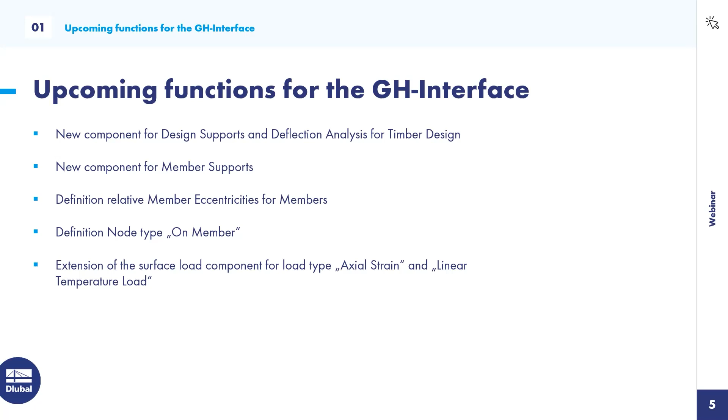Okay, so let's start with the structure for today. Let me first show you a picture. So the inspiration for today's structure is this tower model.

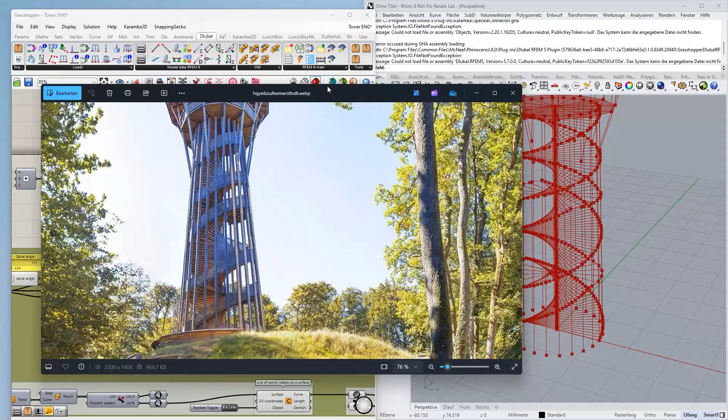And that's how now I show you how we organize the script for this model. Okay, I divided the model into 3 parts.

We have a bottom part for the first spiral staircase, for the second spiral staircase and the third spiral staircase. Every staircase has a different angle for the steps.

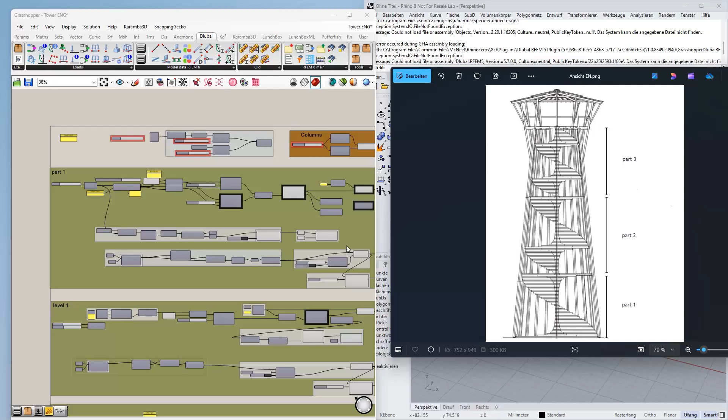So here you can see we have part 1, the first level of the structure, part 2, the second staircase, the second level of the structure, and the third part, and also the roof and the observation platform at the top.

Okay, and the following idea behind this: imagine we are in the early phase of our concept finding phase, and we want to consider different variants or different alternatives for our structure. As a part of this consideration, we limit our structure changes with help of parameters we have defined in the script.

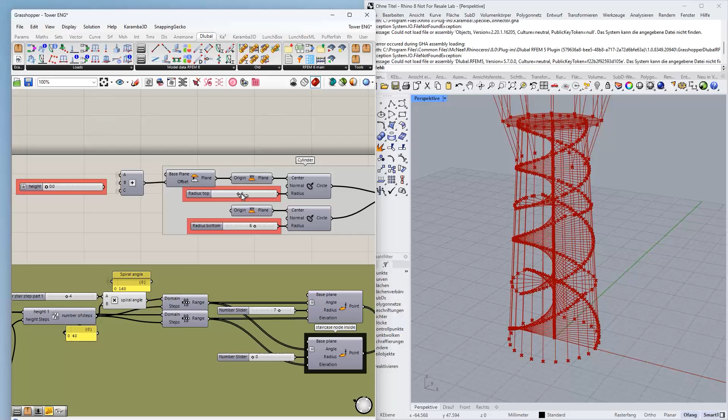So for our structure, for example, we can adjust the radius at the top. We can adjust the radius at the bottom as we wish. And we set again 6. And we can adjust the number of columns we want for this model.

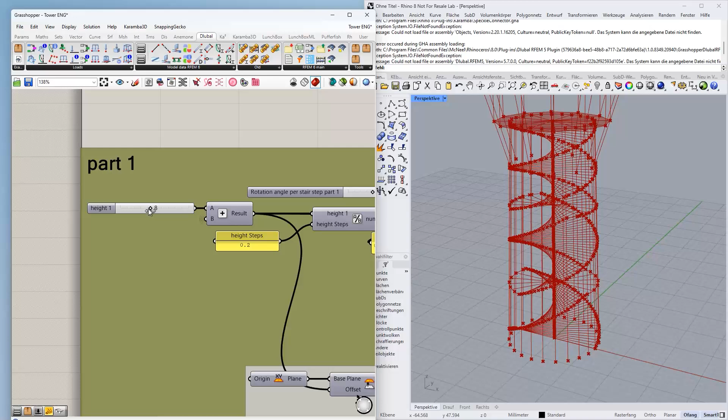And also we can adjust the height for every part. So we have the height for part 1, we can adjust here. Also for the second part, we can also adjust the height if we want. And all these heights are connected in this one number slider, so we can now adjust the height for the whole structure.

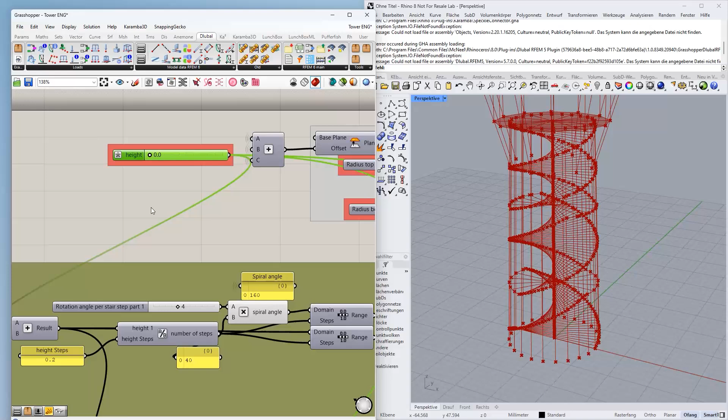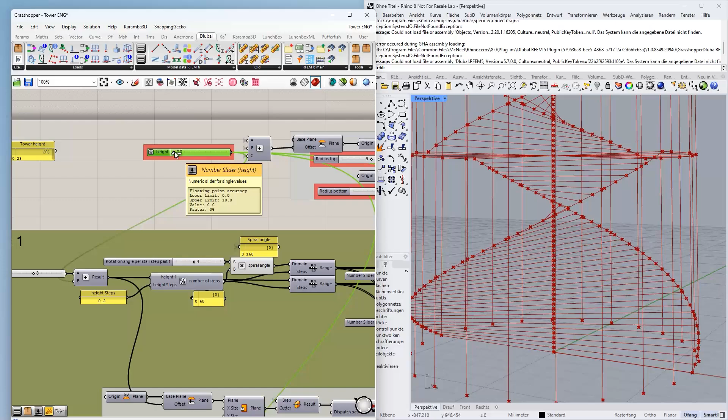And it's like adding one step always to every part of the structure. So we have a height step of 0.2 meters. It always stays the same because it's like these beams stacked over each other, and we can now control this model by adding always one step to every part of the model with this parameter. So we are adding steps to the model, and also the spiral angle always gets bigger if we add more steps for every part.

Okay, now we don't just want to look at the aesthetics and design of the structure, we also want to read out the structural engineering results for possible design variants, without much effort, and include our results into this concept finding process. That's the whole idea behind this structure.

So we need to connect this parametric geometry to a working parametric analytical model, and also extract or calculate the results for this model instantly. That's the plan for today.

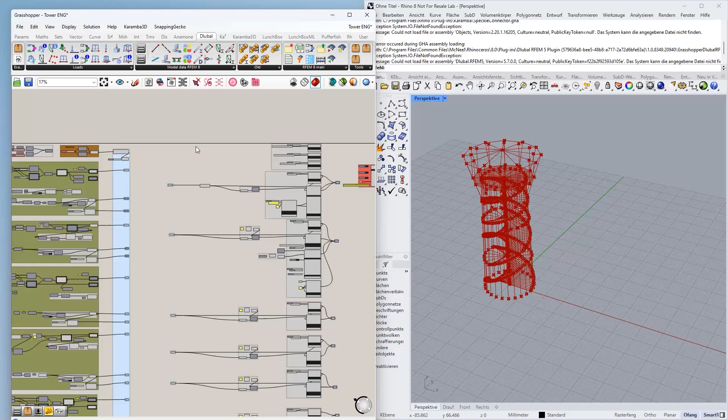A small brief comment on the geometry of this model. We need the model to look at, but we can make it smaller. Let's have a look at this structure of the geometry.

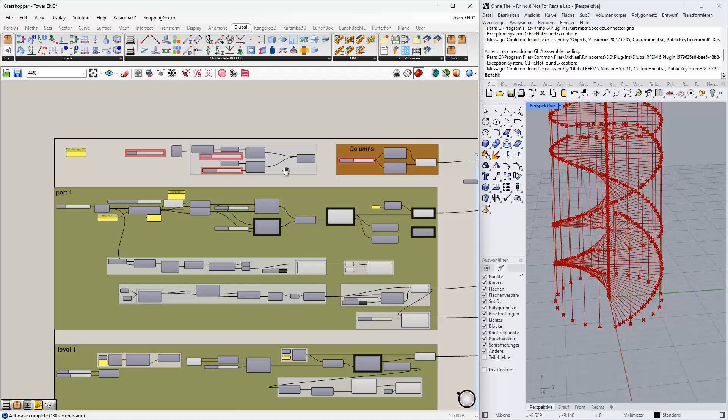At first we have here the lines for the steps, our steps going upwards. These steps have an intersection with this edge beam, and these are the intersection points with the edge beams. This edge beam also has an intersection point with the columns.

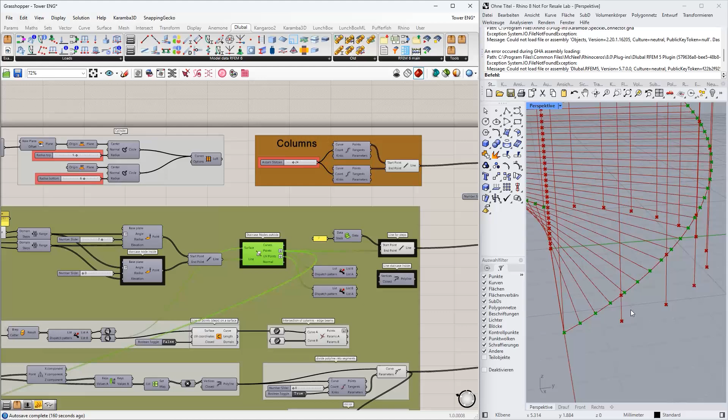So if we generate or interpolate this edge beam only with the nodes of the steps, we get the correct line, but we don't have the intersection point with our columns. We need these intersection points later for member set definition, because we want to define member sets for our columns.

So how I solved this: I took the intersection points of the edge beams with the columns, and the intersection points of the edge beams with the steps. These are these points, you can see both points. Now I generated a line for our edge beams through these points.

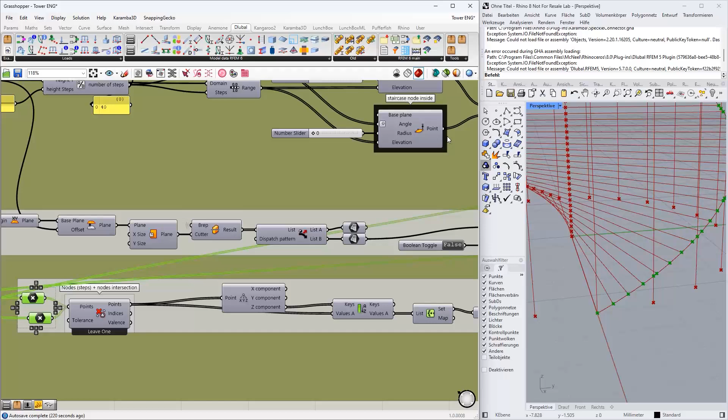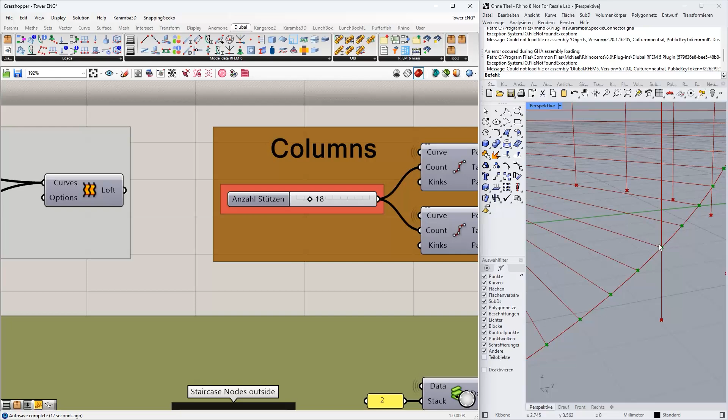The problem we might get here is if we adjust our parametric model in some cases - for example, if we move the number of columns we have here, in some part we get double points. For example, let's have a look. Here we have the same intersection point for the column and the same intersection point for the stair beam, so in this case we would get double nodes in RFEM.

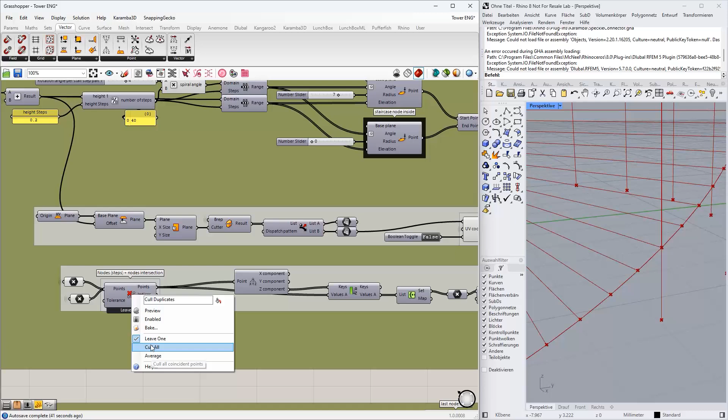To avoid this you can use this Cull Duplicates component under Vector - it removes double points, and you can just leave one or cull all, however you want it. Here we have two points at the same spot, so we can just leave one of them and don't get double nodes inside RFEM afterwards.

Afterwards we can also take this polyline curve we have, and divide it into segments using the Shatter component. So we can divide the line into segments, and we are able to assign every segment its own index number in RFEM.

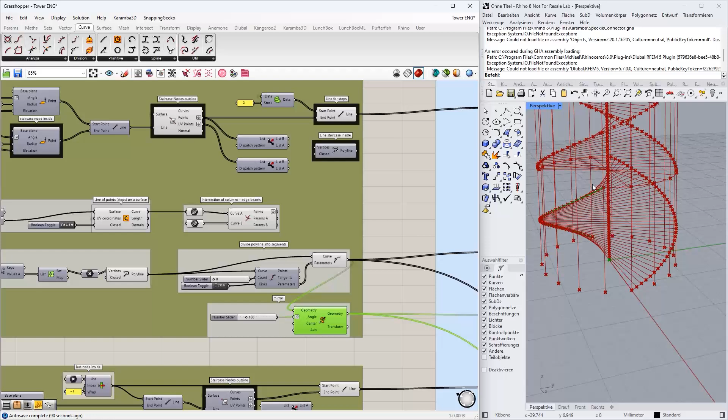Afterwards it's copied on the other side - we used this mirror function to copy it for the other staircase. This is how the script works for all the parts, it's always the same concept. I won't show you more about this geometry, you can have a look at it for yourself afterwards.

What's also important for us is that we also divide the columns. Like I said, we have the column lines and we want them divided at the intersections. Why do we need this? We want to design the columns afterwards as a set of members, and we need these intermediate nodes to define lateral supports at the intersection points.

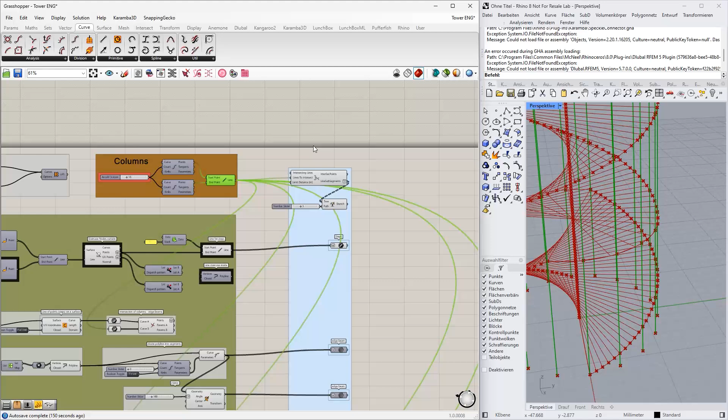For this I used the Line Intersection component, so I can define a line I want to intersect - that's our columns - and define the line this column is intersecting with, the edge beams. Now I can get the segments for every column on a separate branch. Here you can see I only get line segments out of this component, with all segments stuck together in one branch for every column. We can use this later for our member set definition in Grasshopper, making it very easy to define afterwards.

Let's make it very easy to define afterwards. Okay, that's just some comments on the geometry.

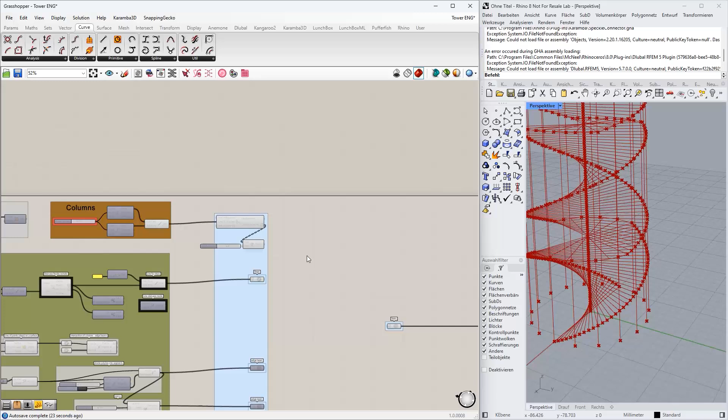If we look at the script we have now for the whole geometry: we have the lines for our stairs, the lines for our columns, the edge beams for our structure, the observation lines for the observation platform, the roof beams, the vertical stands outside, and also the rod in the middle. Now we want to connect these simple lines to our RFEM plugin and use it for calculation.

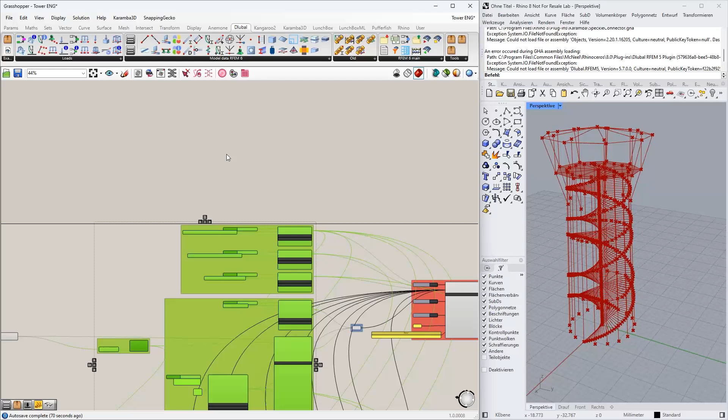Let's start at the top. Here you see the RFEM components. It's the same procedure as in RFEM. First we define the material, then the cross sections, and then we assign members to the Grasshopper lines we have here. We assign the member.

So let's start at the top with the material. I'll make this big. First step is to assign an index number. In RFEM you have an index number for every object we define, so you have the index number for materials, sections, nodes, lines, etc.

That's the same workflow for the Grasshopper components. In our Dlubal plugin after installation you have load elements and model data elements. Here you find the material component. You can define some different stuff we don't need today. So first we can define a material number 1 and the material name.

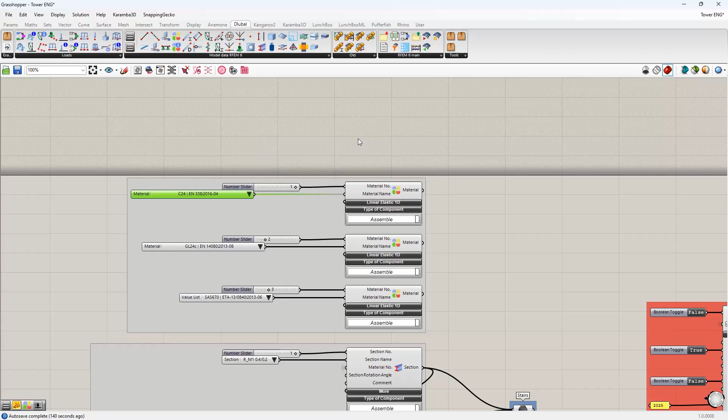Here's something I like to mention: where you get the material name, we don't have a component for the whole material library from RFEM, because it would be a very big library for every country. So it's very easy to define its own little library as a component. So how do you get the names of materials and also for sections?

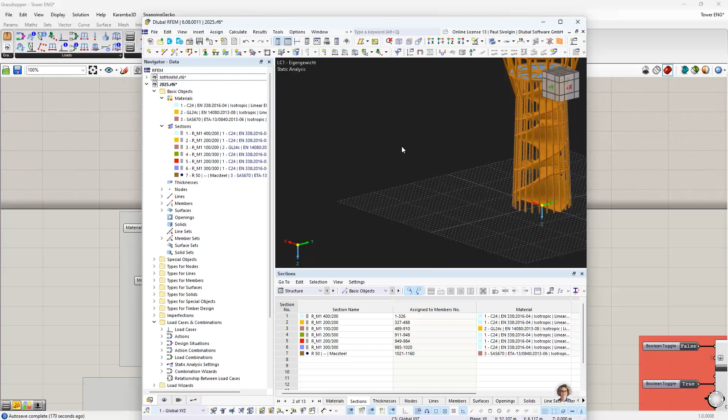I will show you this quickly in RFEM. All we need are the names of the sections, for example, and also the names of the materials. Here you see the full names. It's very important that you use the full names. Where do you get the full names from?

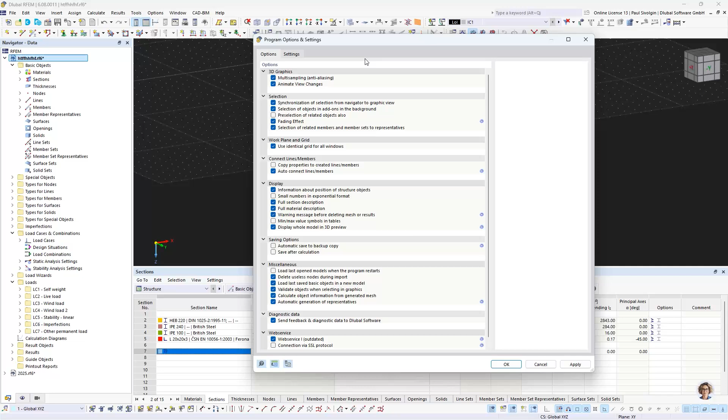If you open the program options, you have the display settings to show full section description or show full material description. That's important because RFEM uses the name of the sections and also the code it's designed with. If we don't display the full name, you will get only short names, and then you use a completely different standard than you want. So make sure you always have this option activated to display the full names.

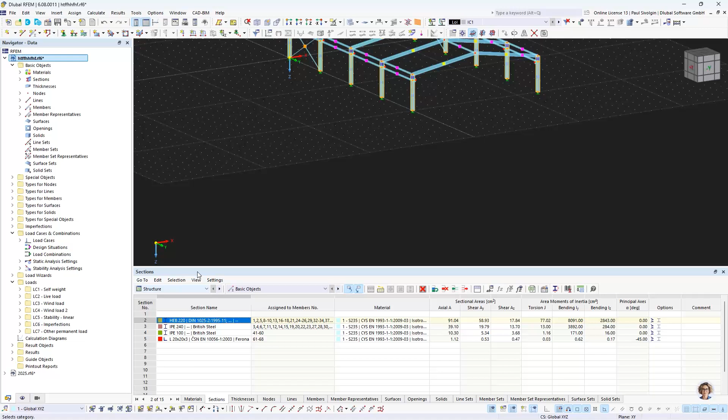And here you also get the standard you're working with. Afterwards we can copy these names and generate a value list, a simple component in Grasshopper, and inside this value list we can edit it and insert these names. So now you have a small component with your own library, and you don't have to do it every time.

You can save this component as a user object. For example, you can create a user object for this component. Here you can set some values: name, RFEM sections for example, add a description, and select in which category you want to have it. Select an icon and add it to your Grasshopper interface.

I already did this. I'm using here some components for my RFEM materials. We have materials defined, and also a component for the sections. We have sections defined and can always use them in every project.

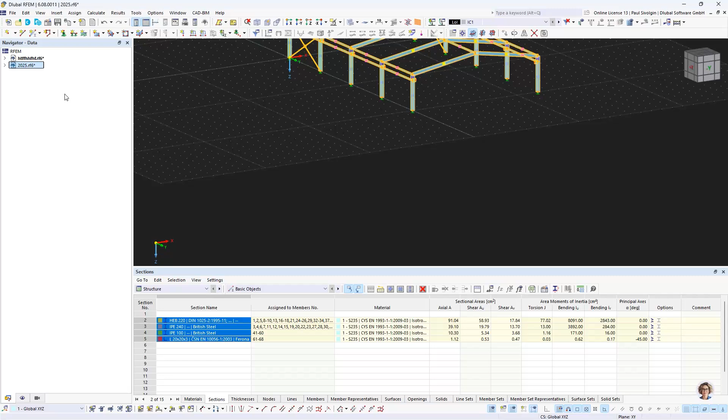So there's maybe another important hint. If you use parametric sections in RFEM, so if you define something like this section, you have parameters you can define in millimeters. It's a bit tricky in Grasshopper because Grasshopper always expects SI units, so our interface works with the Web Services API, and this always expects SI units for the export.

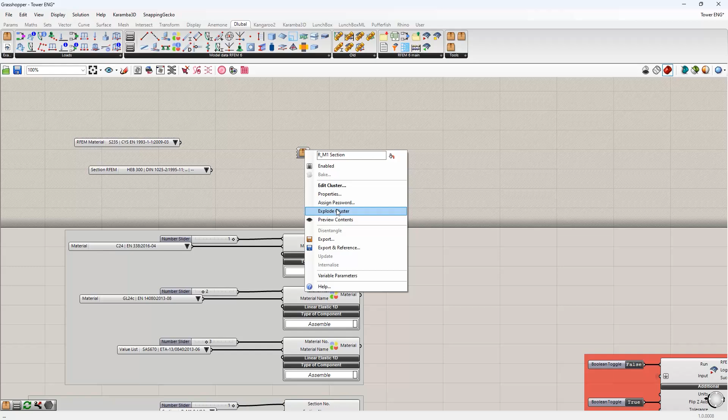And for this, I generated some tools for myself. Maybe I can show this export cluster. For the basic rectangle section, I can always define the height, define the values I want for my section, and then I can just copy this name and insert it into my list. This is automatically generated from Grasshopper.

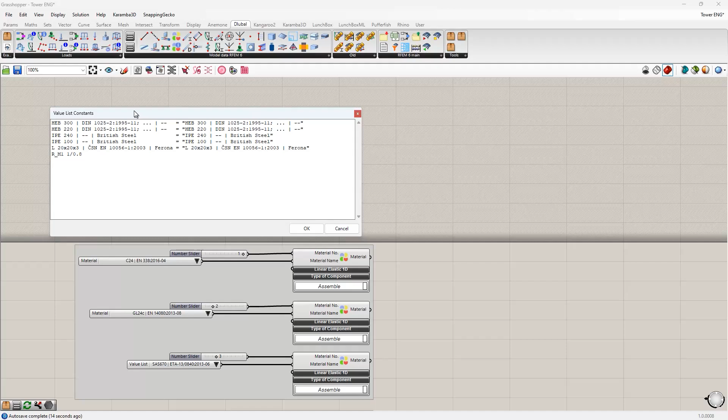So you don't have to find it yourself, you can just insert the name, press OK, and you have the section now inside your little library.

Here you need to make sure if you add some sections while working that you need to save this component again, so you can just delete this user object, mark it and say okay, save this user object. This will be taken over like you defined already, press OK, and this section will be added to this library.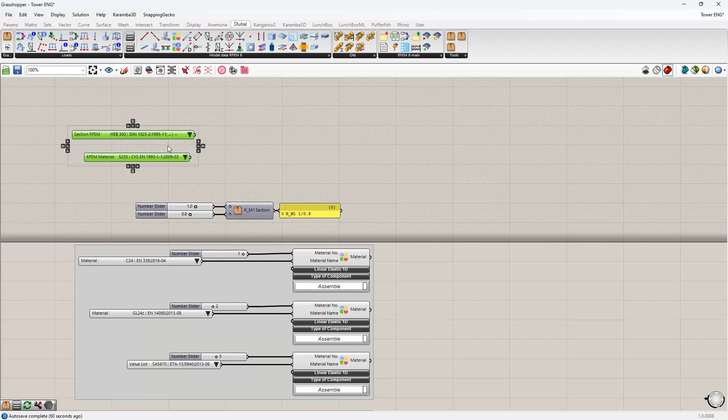Now let's have a look at the further components. Give me a minute. Yeah, to the section component.

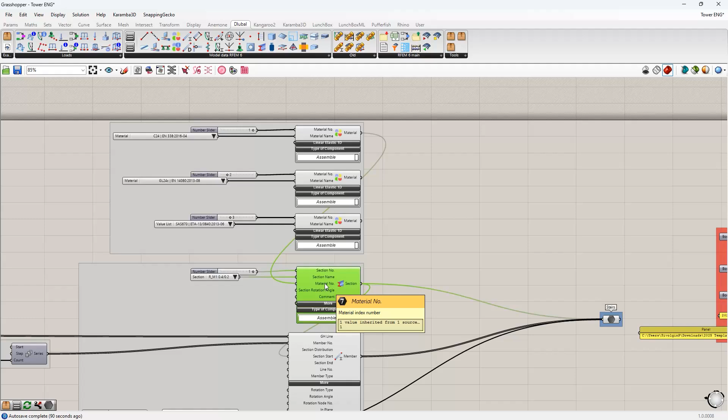It's also the same. You define the section number, define the section name again with your little library you created, and the material number. The material number can be taken over from the material component, so if you adjust here the number will also be adjusted here. We have different inputs for section, rotation, angle, and some other inputs we don't need here now.

And now let's connect the first Grasshopper lines to RFEM with creating the member component. So here we have some lines from our stairs. We assign the member.

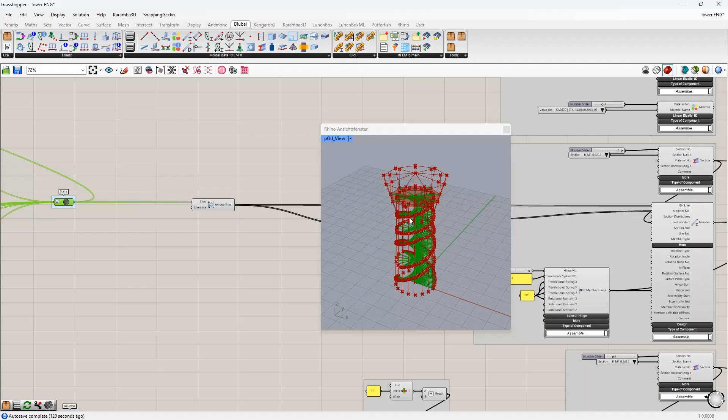Maybe I show it like here, lines from our stairs. And here I have maybe also a hint from my side. I had some problems with double lines, because as I generated the stairs, the last stair of the line is also the first line of the platform here, so I get always double lines at these areas. It's more like an unclean modeling from my side.

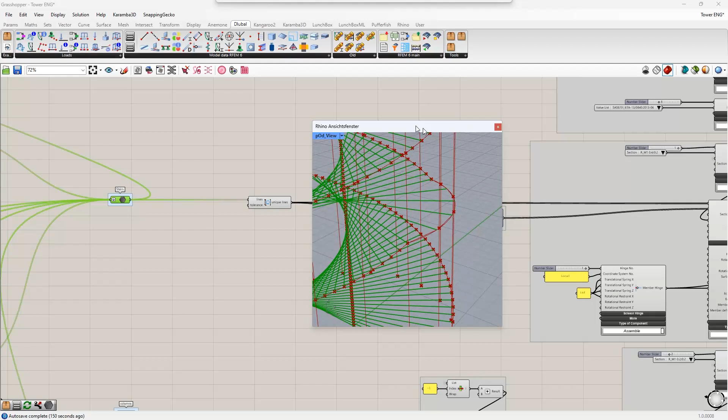But for this problem, there's an easy solution with this component. It's from Kangaroo, the Remove Duplicate Lines component. You can just remove duplicated lines and don't have to remove them with lists or something else.

So here you have 328 values, 328 lines, and here as the output you have 320 lines, so 8 lines removed, 2 lines, 4 lines for every platform, I have doubled lines.

Okay, the next step would be section distribution. This is controlled by a value list, where you can assign what you want, if you want a uniform member or a linear member. I think that's the parts we support for now. So it's basically always uniform if you don't define anything, so you don't have to define this if you don't want something specific.

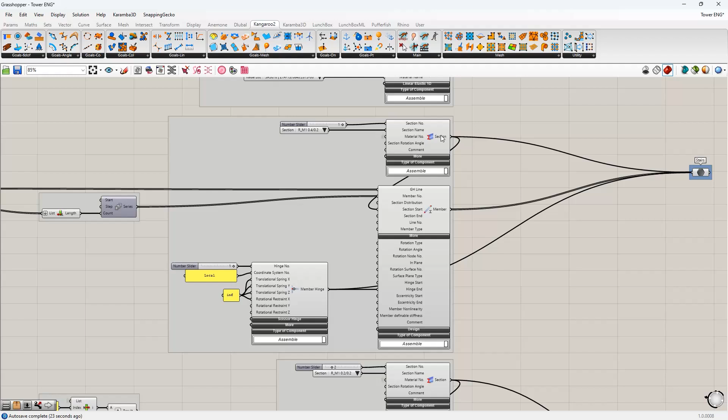The next step is to connect the section. Our sections are already defined, so we can just connect this component for our member.

And afterwards we have, I forgot something, we have the member number. The numbering is assigned automatically, but for load definition in Grasshopper, it makes sense to define it by yourself. So we want to start the numbering by 1.

It's very easy, you can use this series component, and we start the numbering by 1. I have a step of 1, and the count is our value of lines for the stairs. So we take the lines from our stairs, it's the line number, and this should be our list length, and this list length can be used as a count for our list. So we have now here number 1 to 320, and we just connect this to the member number input, and we will generate in RFEM members with the index 1 to 320.

Now if we generate other member components in Grasshopper, we don't want to start the numbering with 1 again, we want to continue this series. This is also really easy done. You can just read out the last number from this component, it's 320. Here we read out the last number of the series, add 1 to the series, and now we have the series starting with 321.

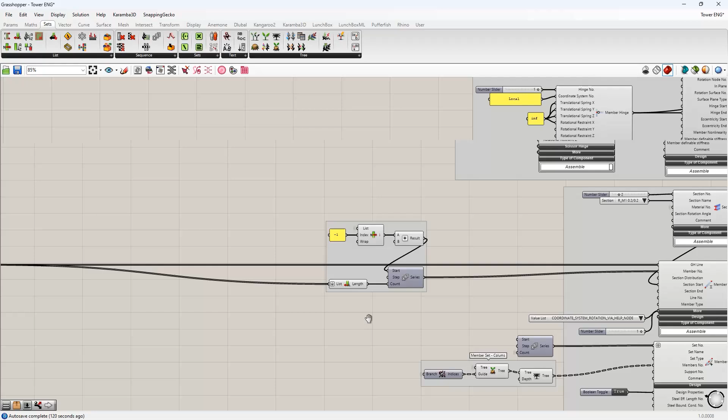Step also 1, and the count again the next list, that's our column list. And we have now the series for our column members. And this just, if you can generate further members, like here, it's just a copy and paste function. So you continue the series of this component, and here the numbering is continued with this series. Here it ends at 441, and this starts at 442, and so on. So it's very easy to find for numbering.

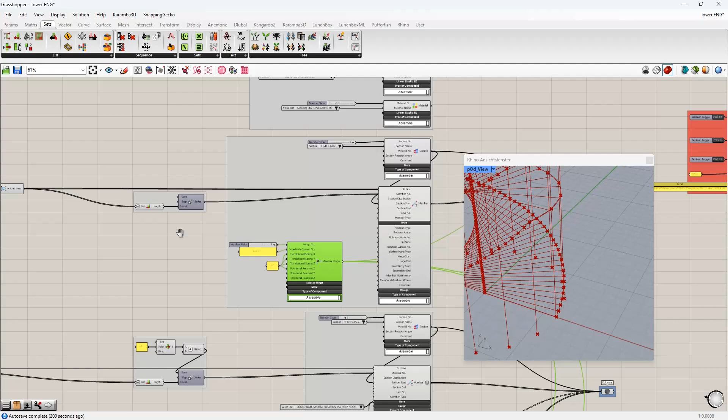Next step would be to define maybe some hinges for our structure. We can also define hinges inside Grasshopper. So for example, we want to define a hinge at the end of every step, and we are not sure if it's the hinge start or the hinge end of our member, and this can be easily checked inside Grasshopper.

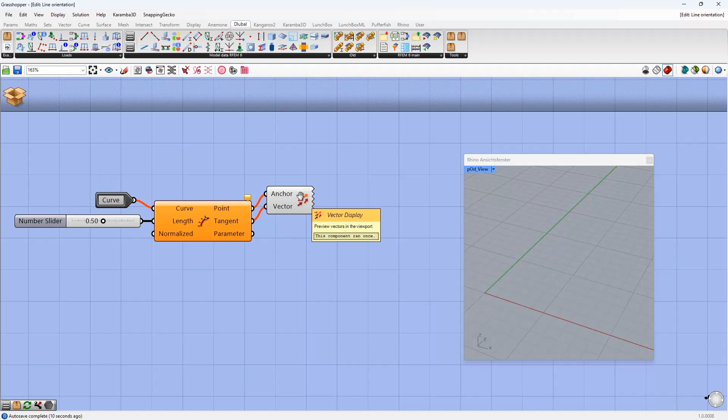So for this I also generated a little help tool. For me it's just, let's have a look, just a component where you define or evaluate a point in the middle of every line, and then you show the vector of every line. And this line start and line end are also transferred to the members in RFEM.

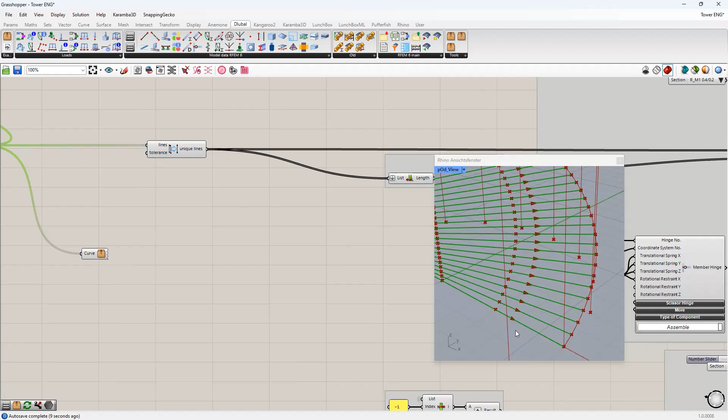So for example, for the stairs, we don't know where's the start and where's the end for the lines. We can check it really quick. So okay, you see the arrow in this direction, so we have here the member start and here the member end, and we want to define here a member hinge, we need to define a hinge at the end of the member. So just as a small tip, you can always check where the start and the end of the beams will be afterwards in RFEM.

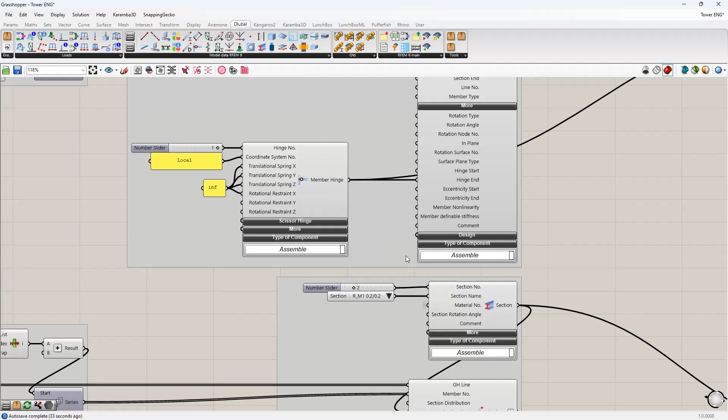Okay, something else. No, we don't find anything else here.

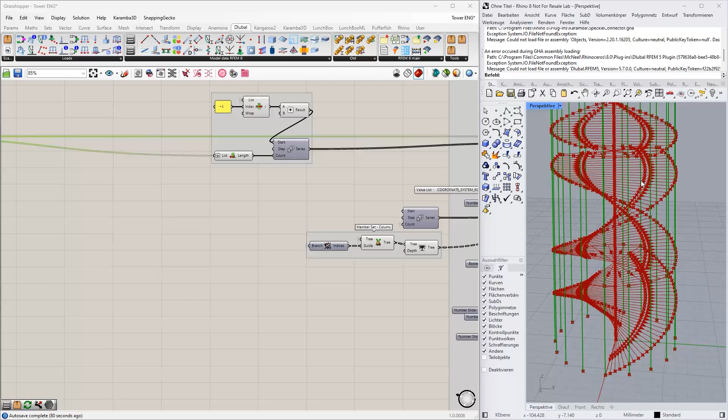Next step would be, I want to show you, look at the time, the member sets. These are member sets for our columns, so we have here our column lines. And again, why do we want to use member sets? We use member sets because we can afterwards define lateral supports at the intersection points or the intermediate nodes of every column.

And that's why we define here the member sets, and how it's done. First we need the numbering. It's again easy done, and afterwards we need a member number as input. Here we have our members for the columns we want to use, and here we have all members from the columns.

And here we have a member input, not a Grasshopper line input. So we have now all members in one component, and if we connect these members to this component, we will get one member set with all members inside. But we do not want all members in one set, we want one set for every column.

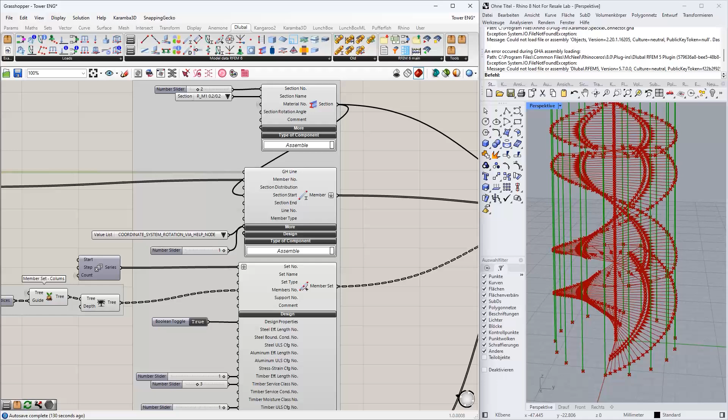So that's why we can use the structure of our lines division that I showed you here. Here we already have every line segment from one column in one branch, and we can copy or use this branch structure also for our members. So we have all the segments of the columns in one branch in this tree structure, and our aim is to organize our members also like these line segments. And how it is done.

Let me show you real quick. We have some component, the destruct path component. With this we can connect this component to our line segments, and to copy this branch structure, and afterwards we can take our members, put it inside this unflattened tree component.

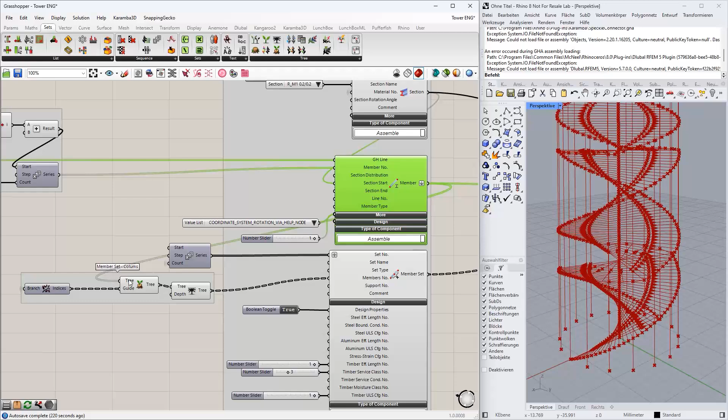And say, okay, organize these members from this with this branch structure from our line intersection segments. Afterwards we can just trim the tree, and we get the same structure also for our members, and this now we can use for a set of members.

So here you see we have, is it 70 lines? It's 18. Yeah, 24. Let me show you real quick. Yeah, we have here 24 member sets, and every member set is connected to one column or to all members from the correct column. And that's the easy way to generate member sets in Grasshopper.

What's the next step? If we want to design the columns with the member sets, we need also to define some design properties for these member sets. And how is it done? Here we have some design property options also available for the members, but we will only look at the member sets today. So you can activate design property sets here, like it's done in RFEM.

And now we can assign only numbers. So what are these numbers? Where do we get this number from? It's a part of a workflow I will show you right now. So let me show you how it's done and why it's only numbers, because we can access a template in RFEM with Grasshopper, so that we can only adjust numbers for the design properties.

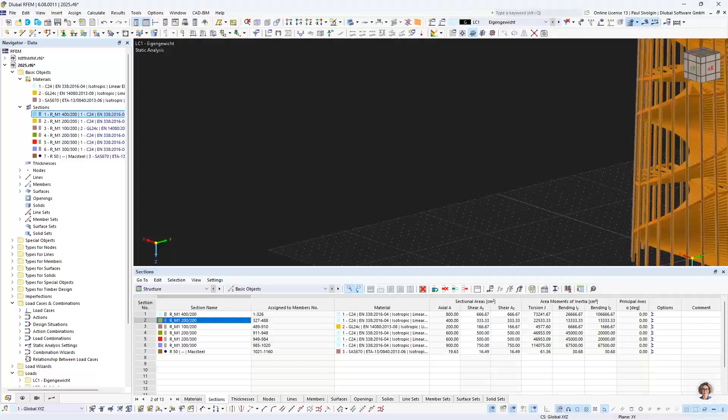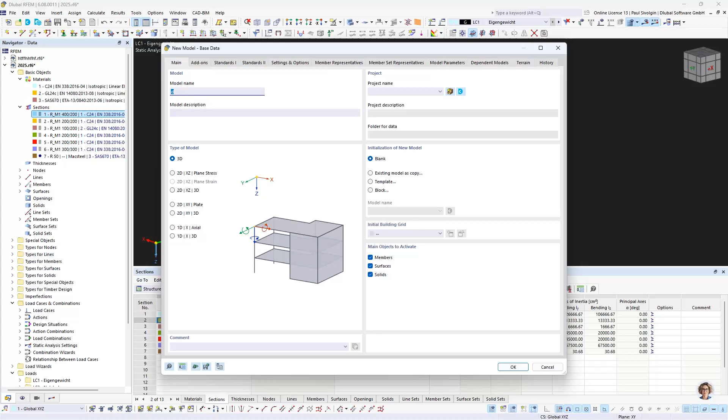So what's a template in RFEM? Let me show you quick. If you are in an RFEM file, you have always the possibility to save a file as a template. So if you create a new file, you have the basic inputs like name and so on, and here you have also the possibility to start the new model with a template. A template is like a predefined file where you have objects and settings defined.

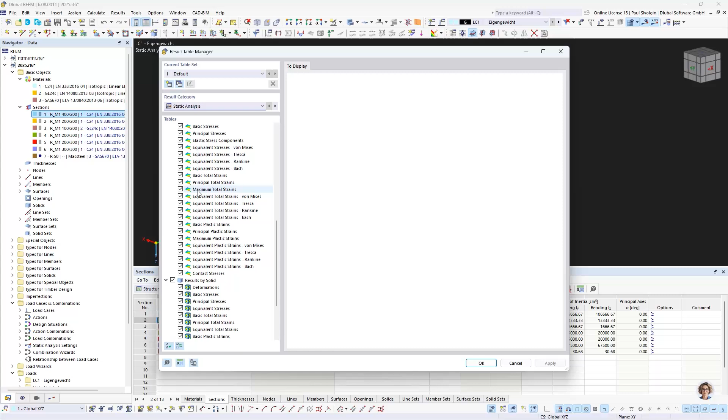For example, you can activate timber design, you can select your basic standards you like to calculate. You can already define load cases, you can define load combinations. You can also adjust the result tables you want shown afterwards in the printout export or in the Excel export. And you can also, what I would like to show you, define design properties, for example timber design properties or types of timber design.

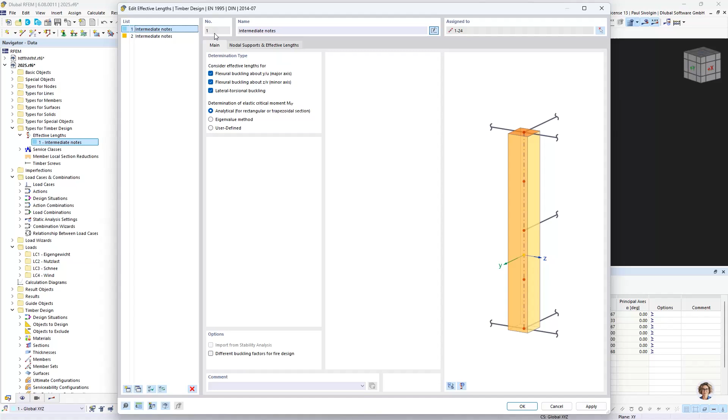So for example, here the effective lengths are defined with types. We have here number 1, number 2, and here you can define inside what you want to look at. So in Grasshopper, we only refer to these numbers from this defined template. So here I have a template where effective length index number 1, we have defined intermediate nodes for our structure.

I define service classes 1, 2, 3. I can assign 2 in Grasshopper, and you can also define for the timber design, for example, the ultimate configuration, like you want the configuration with stability design and one without stability design. Okay, need to uncheck this, it's wrong defined. Yeah, one for the stability design and one without stability design.

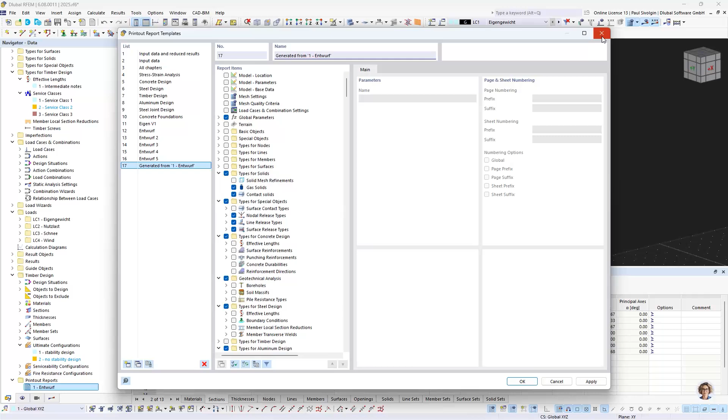And afterwards, if we define everything inside RFEM, we can also—I forgot one thing—we can also define some settings for our printout report. For example, here you can define what you like to see in this report. I get here some settings, and afterwards you can save this also as a template for use afterwards. It's the same if you print out graphics in the report.

Here you can print out graphics in the report. You have the settings to set more than one print in the report, and you can define which view you want to see in reports.

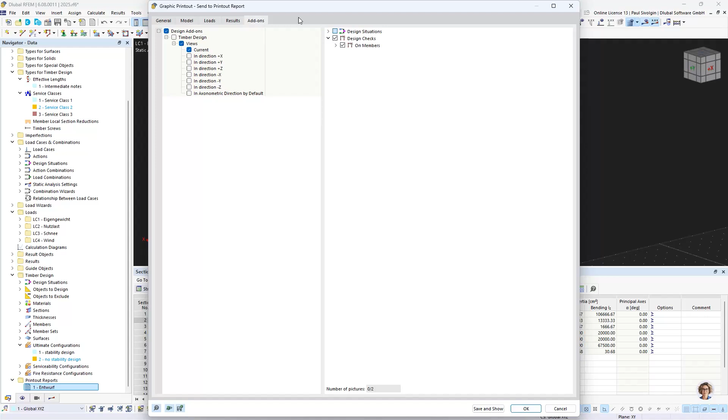You can create a view in every direction, for load cases, for results, for the design, and so on. This also can be saved inside this template with save as template. If you have all this definition, you save this file as template, and it will be saved as template.

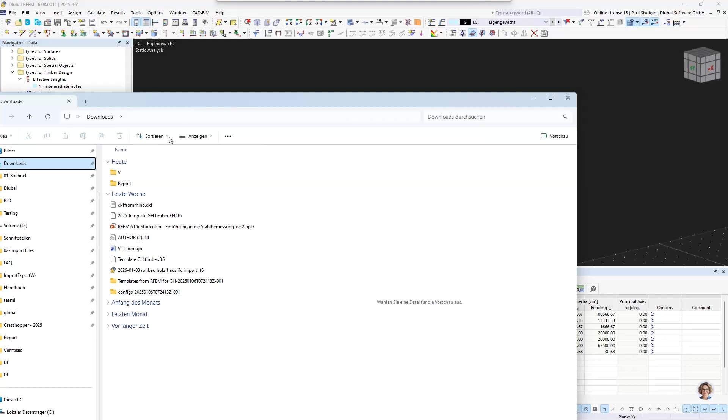An important thing, this template file is generated as an FT6 file. To access this file, you have to connect your project at the folder you saved the file inside to your Dlubal project. So if you open the Dlubal Center, you have the tab model templates, and inside here you can just connect a folder as a project. For me, it's inside my download folder where I already have some templates defined to use.

What else is the benefit of using these templates? This also allows us to control or define loads very quickly, so we don't need to define load cases and load case combinations inside Grasshopper. You have the possibility to define it inside Grasshopper, but if you already defined this in your template in RFEM, you can just refer to this template and don't need to define these components by yourself.

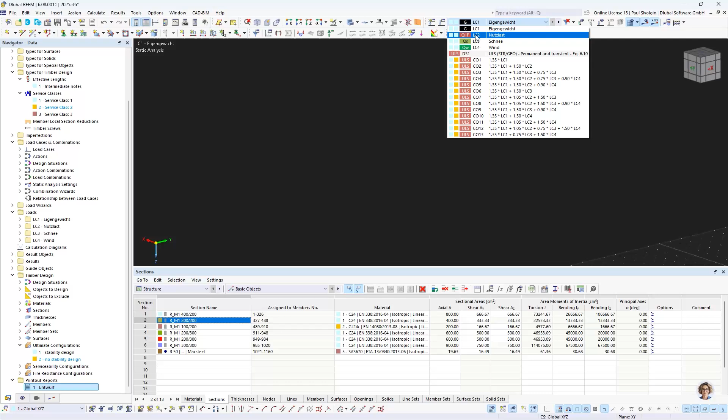For example, just for a quick show off, here we have some surface load. What's the load input? We have surface load number, automatically generated, or you can give it a 1 if you like, and here just a load case. So you don't have to define this load case component fully and connect a load case number here. You can just refer to the load case in our project, load case number 2. It's already defined in this template, so it regenerates the load in this load case. At the other inputs, you already saw, I think, it's always controlled with value lists.

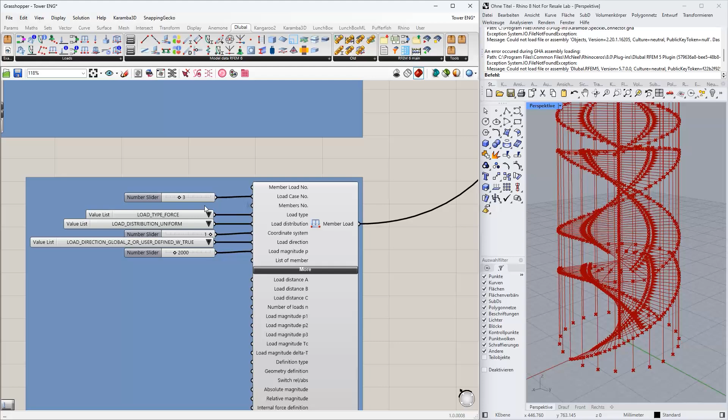And here I also have a member load. For another load case, you just define the member component, define everything with value lists, and assign the load case number. And that's all. Just connect it to the RFEM component, export component afterwards.

Let me show you now the RFEM export component. I have defined my member inside here and collect it in this data component, so I don't have to connect everything with my RFEM component if I make some changes. Here we have the export component, under the RFEM 6 main tab.

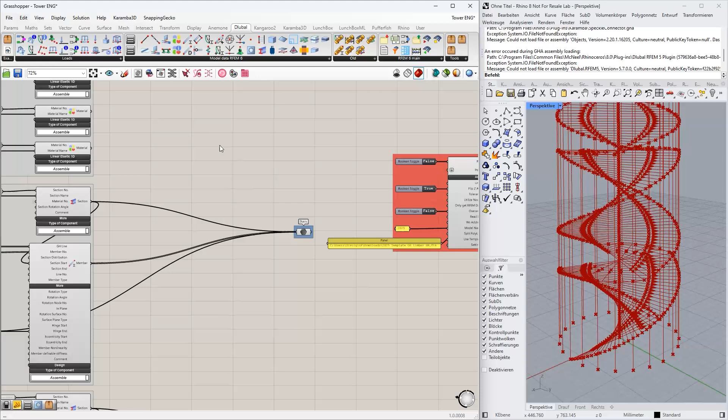Here we have the export component. First, you can define a Boolean toggle to run the export. If you activate it, the export is running. For the input, you connect all the Dlubal components we use. It's easy to check: click the component, press Control and left arrow button, and you see which components are connected. Now it's directly connected to materials, and every RFEM component is green, meaning they're all connected to our component.

What else do we have to define? We can flip the axis and some other settings, but the most important for us now is the use of the template. We saved our definition inside here as a template, and this template is located in our downloads folder. Again we can copy the path of this template and insert it inside RFEM. So we have the template path we refer to, and we give a model name to our structure.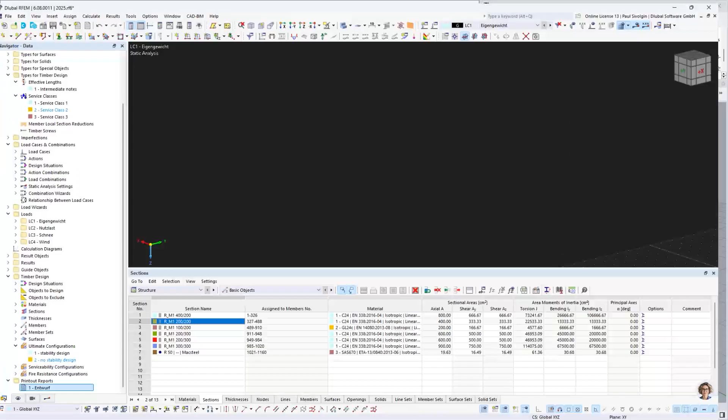Most important thing, you have the overwrite function on false, because what happens if we export the structure now to RFEM, it will generate a new file. This file will get its name, and we will load a template - that's our template from the downloads folder. It will load the template, and afterwards, if we set this on true, it will override our model, and it will override all definitions inside this template. So it will not work with the overwrite function on true. So it's most important to set it on false.

And afterwards, if we export as a structure, we also want to calculate if it's exported successfully. So for this we can use our calculation component to start the calculation in RFEM. And after the calculation is successful, we can also use this export printout report component to export the printout. We define a path where we want to save this printout, and all settings for the printout will be used from this template we defined.

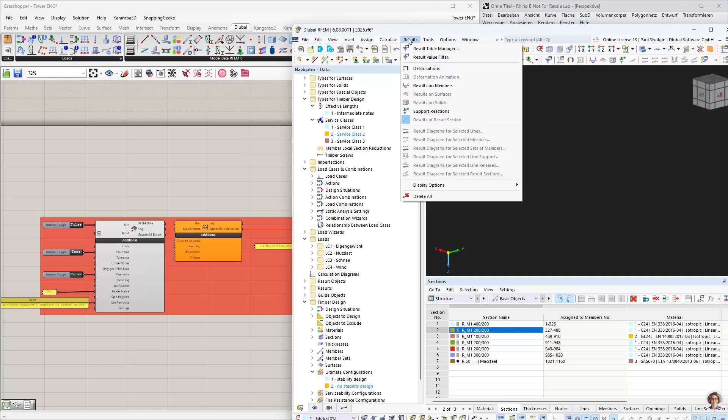Okay, this is also for the Excel export. If we define, let me show you the results table inside a template file. Don't check everything, for example. This will also only export the result tables we want to see in this CSV files.

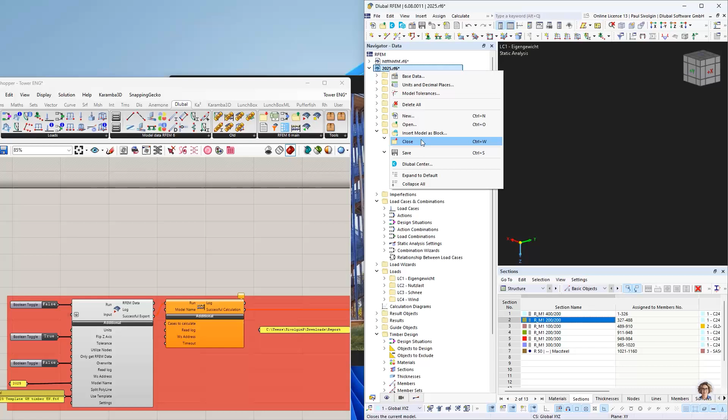Okay, now I want to show you how it's looking if you export now the structure. Let me close this one. This one we also don't need anymore.

So we have our structure, we have our RFEM components all connected. Now we can start. Let me make it half screen. What's that? Okay, we can start the export.

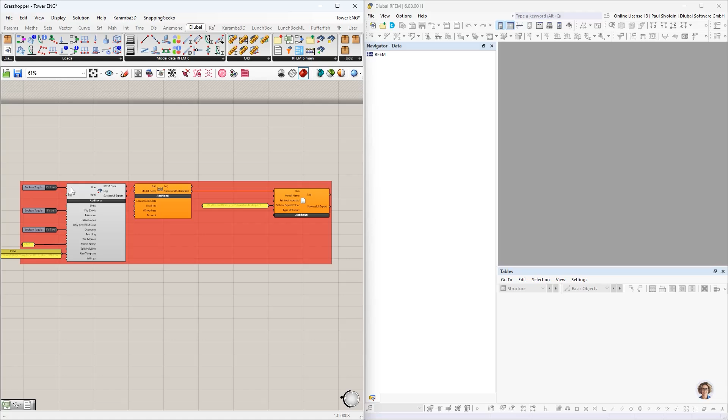If we set the run boolean to true, the export will be started. Here is the connection to RFEM. It's locked the application. The template is loaded. You see already load combinations inside this file.

Take some time. Okay, the structure is there. Now you see the application is locked again. It's generating the mesh and calculating the static analysis. It's calculating now the timber design we defined with the design properties already in the template, and afterwards it exports everything in printout report. Now you see this is green, it's successful, this is green, it's successful, and report also exported.

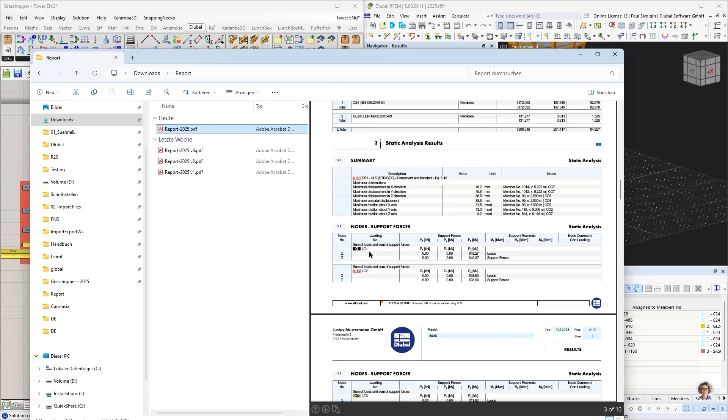Now what's the result? Now we have a small generated report with every important info we like to see. For example, the load cases inside here, the part list, a summary of the deformation, the support forces later for the ground, for the foundation, for example. Let me see, and static analysis results as a summary, the member internal forces, the total maximum and minimum forces we have in this structure, and some overview for the timber design.

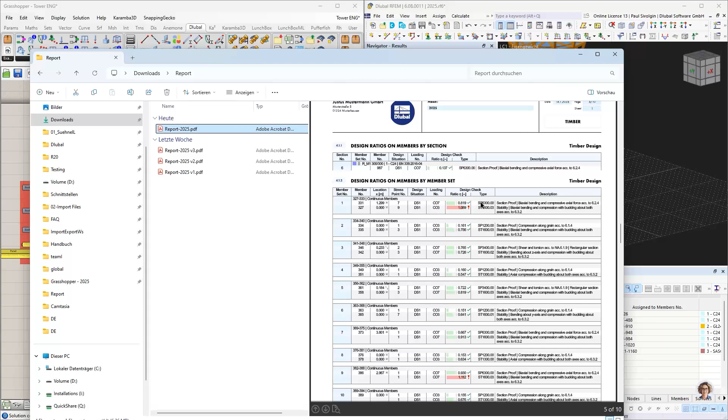Here we have to look at the sections again and adjust them. And here we have our member sets, that's our columns 1 to 24. And now you have a section proof and stability proof for every section as a small overview, and also the views of the model, so you can quickly check if it's okay for you or not.

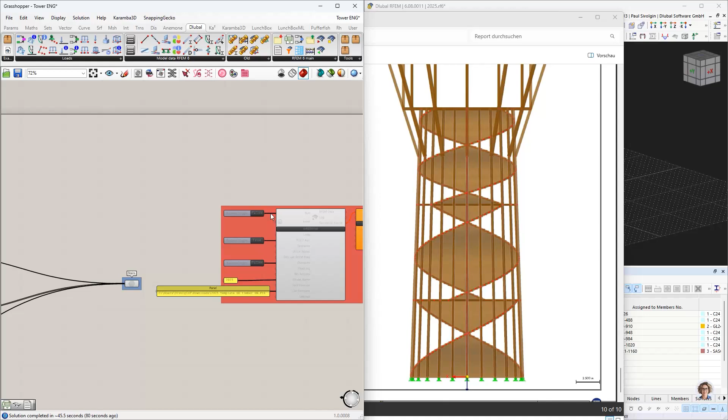So now if we adjust this parameters and export it again, we can generate other reports very quick for the structure. Why it's not showing? Yeah, and you can look at different parameters and how it affects your structural analysis in some point.

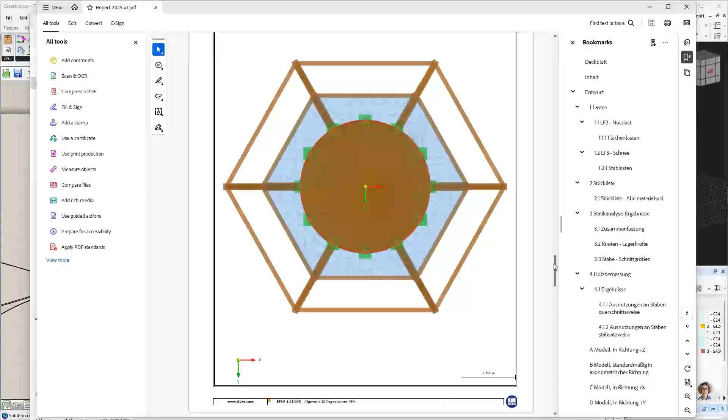I have a quick overview for every tower you calculate, maybe something like this. You have a quick preview, a quick pre-design with settings you adjusted. The tower maybe looks not so good, but just as an example.

Yeah, and this is how you can create different reports and have some significant information inside from this analysis inside RFEM. So this is not a full calculated structure for sure. It's more like a foundation for discussion of alternative designs of a structure, and so you can adapt the parametric geometry, for example here, and get instant results for estimate structural engineering results, or for the variation of your structure directly.

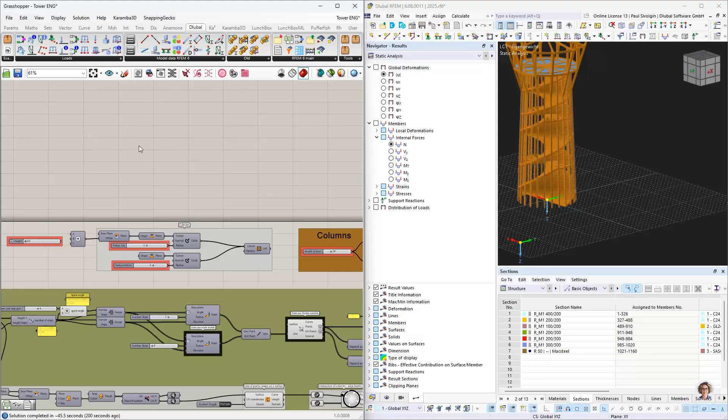Of course, I'm missing out looking at different analysis points for a tower like this, like the dynamic analysis, the structural stability, but this should serve more like an idea of how you can use our interface, or how it can be used to interact between Grasshopper and RFEM in the documentation.

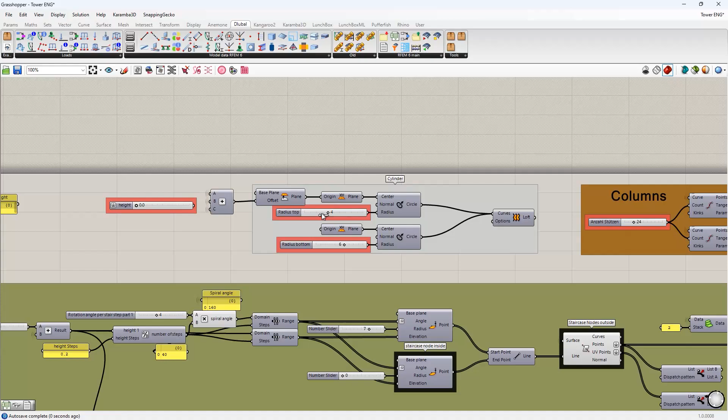And thinking one step ahead, maybe you can automate this design process. And now we have a large number of different configurations for the structure. We have our parameters, we have many possible solutions for a structure depending on the defined limits of these parameters and depending on the goal we aim at. But maybe at some point we have an optimal solution with the optimal parameter settings inside here. And for the future, sure, our aim is to optimize the process to read out results into Grasshopper and optimize the structure based on these results we read out of RFEM.

But that's a different topic. The aim for today was to show you the first steps of linking the parametric design with the structural design.